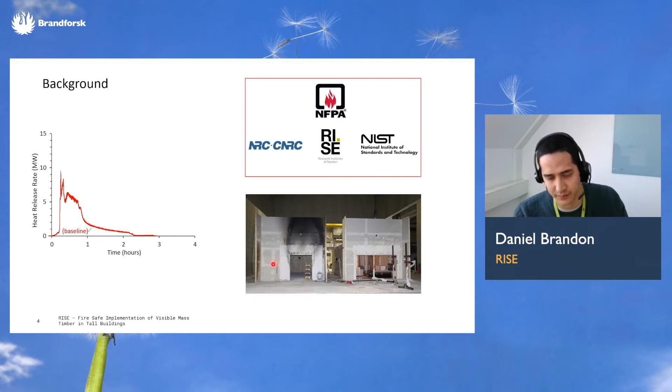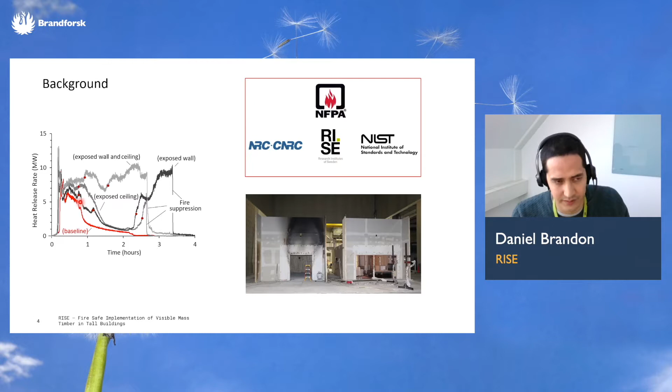I now add the results of the other test where some CLT was exposed, and you see that in contrast with the baseline test where we have a steady decay, there are locations and times in which the heat release rate increased, and we know that the movable content on the floor reduced in combustion rates. That does indicate that the combustion rate of the structure increased at these locations.

It was clear that fire-induced delamination was the cause of this. During fire-induced delamination, also called glue line integrity failure in Europe, the exposed lamella falls off due to weakening of the bond line, and it exposes a new colder surface to the fire. If the fire temperatures are hot enough, this surface heats up rapidly, chars rapidly, and combusts rapidly.

If we manage to avoid this delamination, then we could expect these points to change, and the fire dynamics in the room will change significantly.

As a response to this study and also some other studies that showed the same effect, there was a new regulation included in the PRG, a new test included in the PRG 320, which is the product standard for CLT in the US and Canada. In Europe, we expect an annex with a standard test method in the next Eurocode 5.

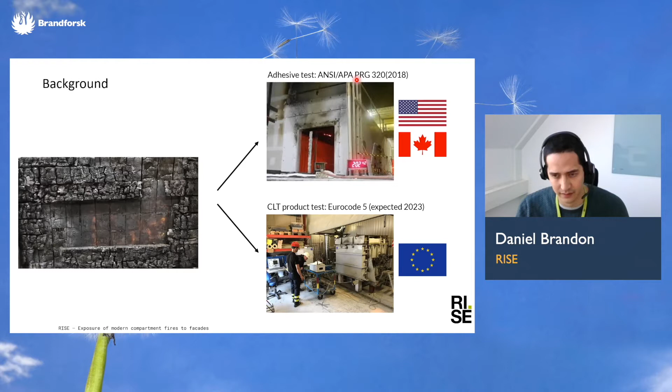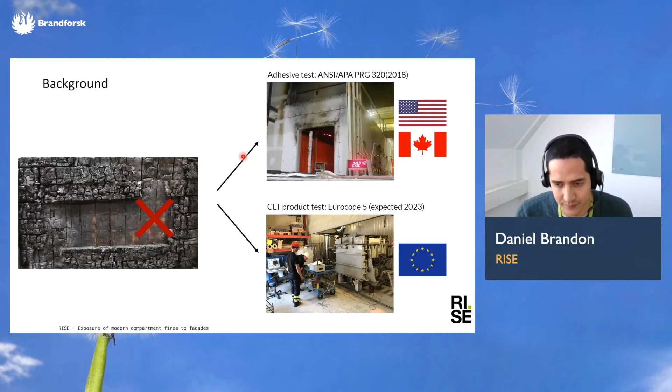And those both aim to avoid this delamination and subsequently affect the fire performance of CLT in compartment fires in a positive way.

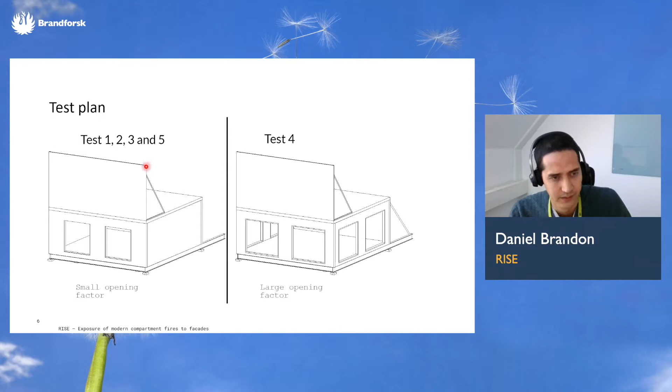So now with the new regulations, we actually need tests that are conducted with materials that comply with these new regulations, and that's why we did these tests. We performed 5 compartment tests, 4 with a relatively small opening and 1 with larger openings. We added a facade extension on all compartment tests to study the exposure of these fires on facades.

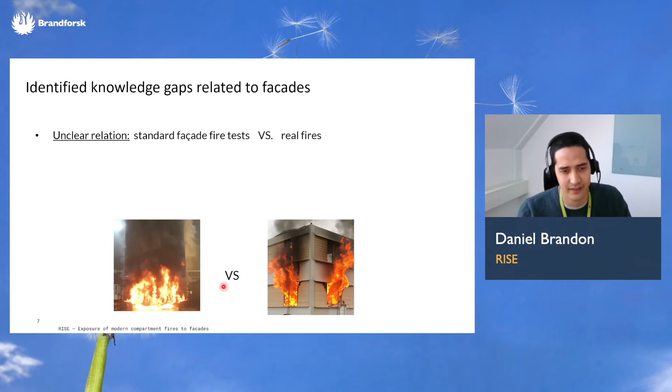One of the reasons to perform this research and study the facade fire exposure is that there is an unclear relationship between standard facade fire tests and real fires. Also, the number of compartment fires with essential measurements for comparisons are lacking. We didn't find a compartment fire test with measurements on the facade that correspond to multiple standard facade fire tests. And if we have that data, that would allow us to compare multiple standard facade fire tests, but also to assess whether these tests have a relevant and representative exposure.

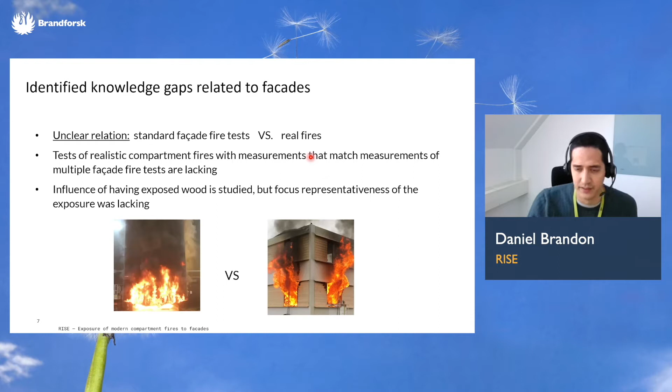Lastly, there have been studies that showed that having exposed wood inside a compartment can have an influence on the external fire plume. However, in those studies, there was no focus on the representativeness of the compartment. We know that, for example, the width of the opening has a significant influence on the fire plume. It is correlated - for slender openings, you can expect higher fire plumes.

And therefore, it is essential to test representative compartments in order to have a representative exposure.

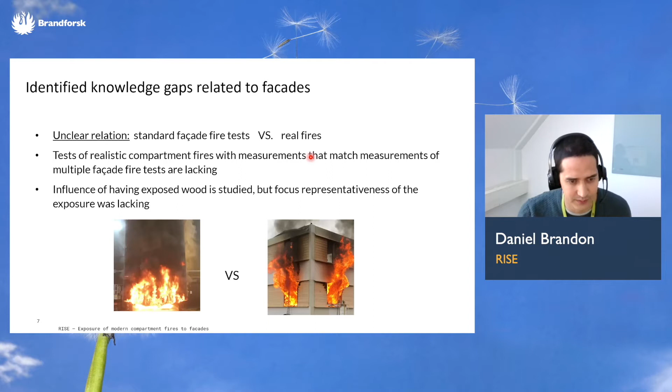In response to the gaps that we just showed, we have the following objectives: collect data of the thermal exposure to the external facade in relatively severe fire plume scenarios, compare the exposure to the facade to that of a number of standard test methods for regulatory compliance in North America and Europe, and mapping the change of external fire plume as a consequence of exposing larger surfaces of mass timber.

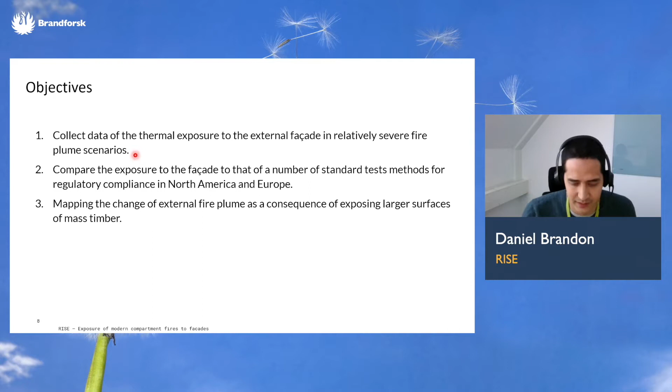In the first objective, I mentioned relatively severe fire plume scenarios, and that needs some explanation. To achieve relatively severe fire plume scenarios, we used statistical data from a recent study in Canada, which are the upper two distribution curves. But we also needed to have information of opening factors, and that we needed to do ourselves.

We performed a survey to determine opening factors of about 700 residential and office compartments, and that resulted in this distribution below. With these distributions, we predicted the expected char depth after a fire using a simple parametric fire model.

This model is simple enough to perform many times. We performed this calculation 100,000 times, where the computer chose a floor area, fuel load density, and an opening factor randomly, but based on the distributions. So after 100,000 calculations, we got this distribution of the final char depth.

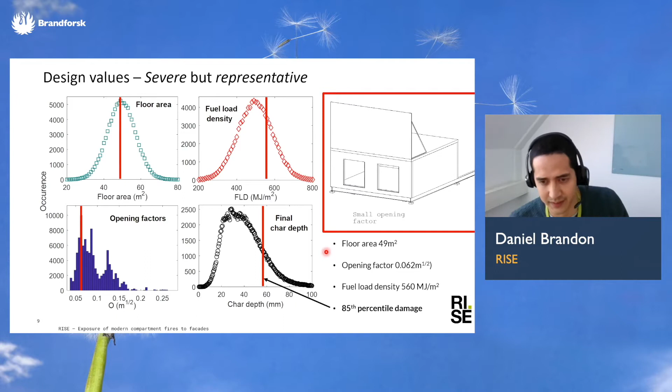We made sure that our test scenario had a relatively high expected char depth, and we ended up with the 85th percentile value of the expected damage or the expected char depth. The compartment that we chose had the mean value of the floor area according to the Canadian study.

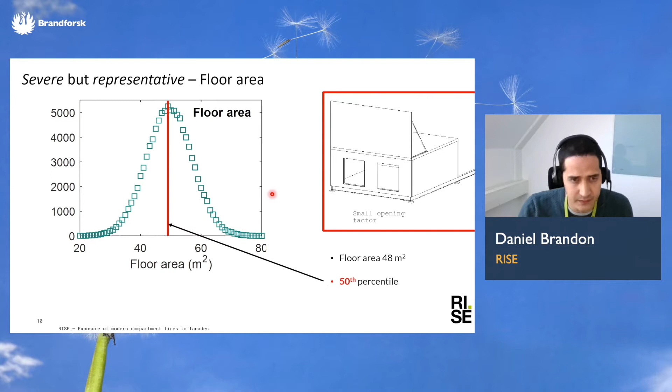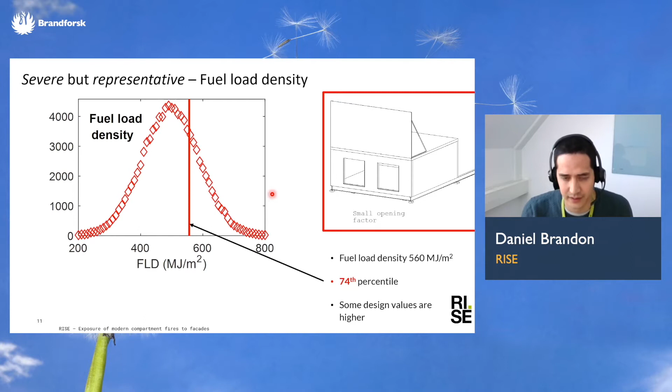We ended up with a 74th percentile value of the fuel load density. And that means if you have a higher fuel load density, we can expect a longer fire.

We also had a relatively small opening factor, which corresponded to the 25th percentile value of the whole database and the 7th percentile value of mass timber buildings. And that indicates that in our database, the residential mass timber buildings seem to have higher opening factors. We ended up with a low opening factor because that is the most severe scenario - there we can expect longer fires and higher damage after the fire.

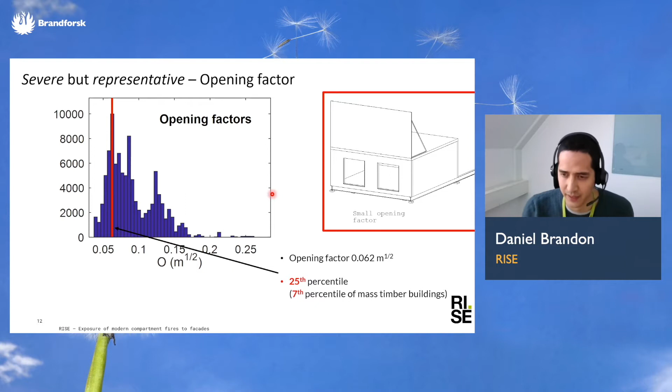So for the small opening factor, we ended up with a small opening factor compartment, shown in this distribution. The large opening factor compartment corresponded more with the office compartments that we had in our survey, which are shown in purple here.

The test specimen that we have of test 4 corresponds roughly to the center of the distribution of opening factors that we found.

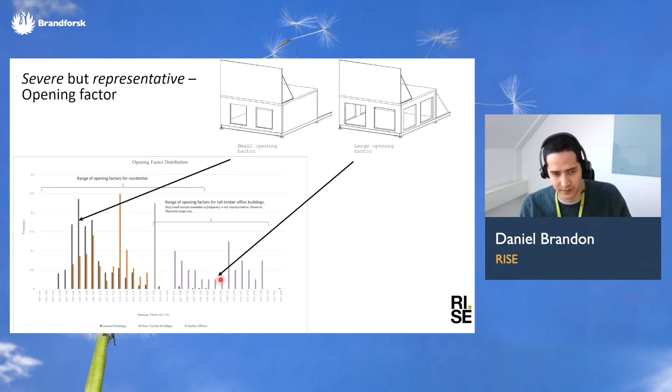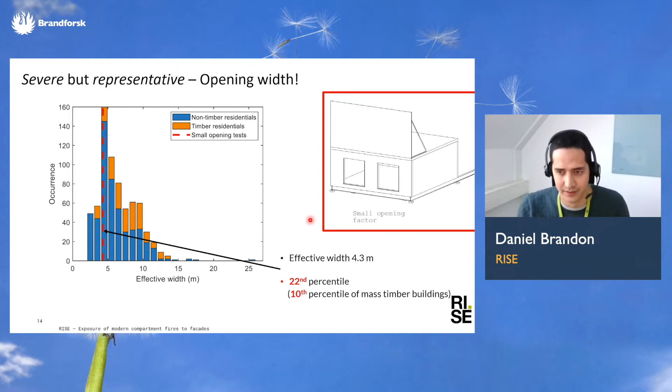For facade fire exposure, we know that the width of openings is important. For slender openings, we expect a higher fire plume, so it's important to be on the lower side of the distribution of width of openings that we see in real buildings. According to our survey, we were at the 22nd percentile value of the opening width, which was the 10th percentile value of the opening width for timber buildings, since they seem to have larger openings in the survey. This relatively slender opening would result in a relatively high fire plume.

Besides having a relatively high fuel load density, a statistically low opening factor, and statistically slender openings, we also had exposed surfaces of mass timber, which contributes to a more severe fire scenario. We had tests with surface areas of exposed wood varying from 54 square meters to approximately 100 square meters, corresponding roughly to 110% to 200% of the floor area.

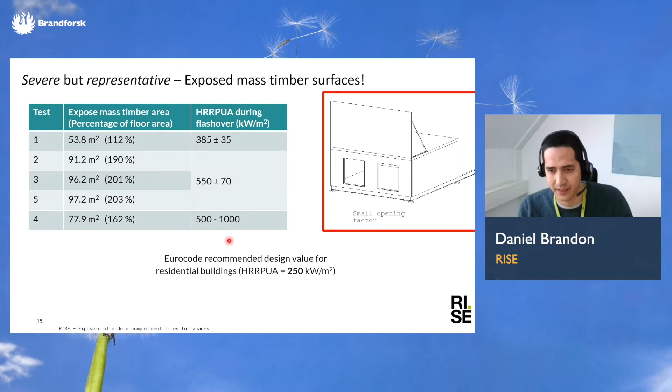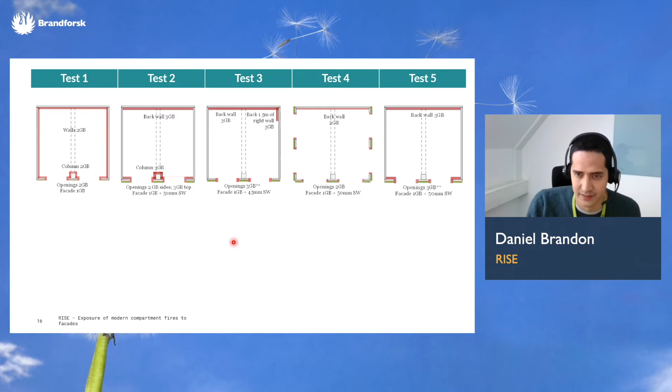The configurations of the tests were not all known prior to the test series, with the exception of test 1. Every other test had some parameters decided in between tests, namely the amount of exposed wood and the amount of protection on the protected surfaces. This decision was made between every test based on the performance of the previous test, modeling predictions, and the opinion of the steering group.

We started with the ceiling exposed, and in test 2 we increased the exposed surface area by exposing the left and right walls. The rest of the surfaces were protected with 3 layers of gypsum board. In test 3, we only protected the back wall and a portion of the right wall. In test 4, we only protected the back wall, but we only needed 2 gypsum boards in that fire. In test 5, we protected the back wall and 2 strips in the front wall.

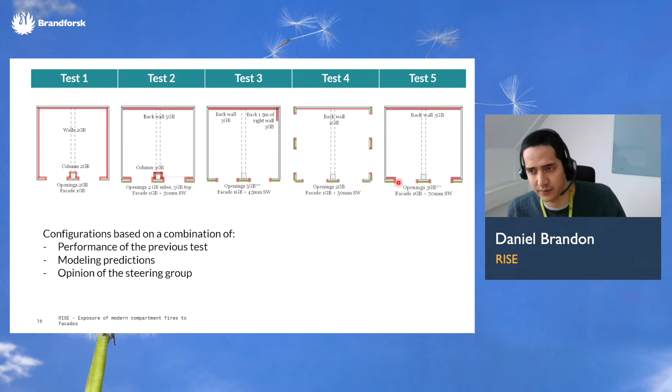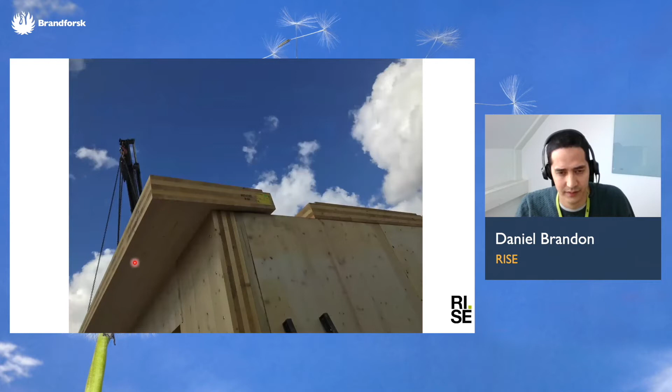Here you can see all tests at the same time, starting from flashover. You see immediately that after flashover, test 4 starts to cool down. The intensity of the fire reduces, and that happens slightly later in test 1. In test 1, the fully developed fire lasted 22 minutes, and that was longer in tests 2, 3, and 5.

For reference, we added a video made by NIST of a test in the NIST lab of a CLT compartment that doesn't comply with the current PRG 320/2018 regulations. Here you see the fire of test 1 starting to decay. Tests 2, 3, and 5 seem very similar, which makes sense since they also have relatively similar amounts of exposed wood. Here you can see the difference between the reference test and our tests increasing significantly, as this fire doesn't seem to decay.

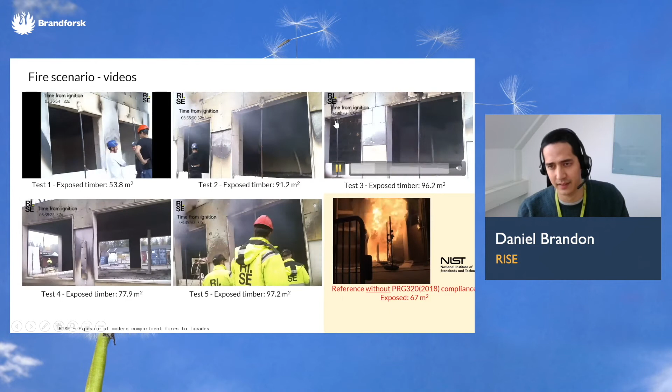At the end of the tests, the fires decayed mostly. In test 1 and test 4, there was very limited smoldering. In test 2 and 5, there was some smoldering in the walls, and in test 3 we had a reignition of some flaming in the walls. In comparison with our reference test, these results show a much more desirable fire scenario.

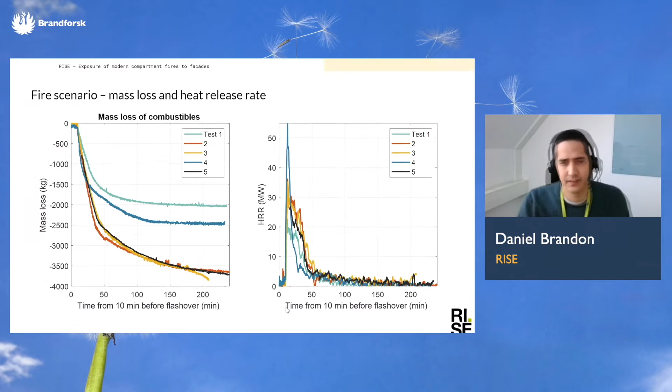For the facade fire exposure, it's important to know the heat release rate of the fire. The heat release rate in these tests was determined from the total mass loss, with some corrections for the mass loss of gypsum boards. That is all described in the full report.

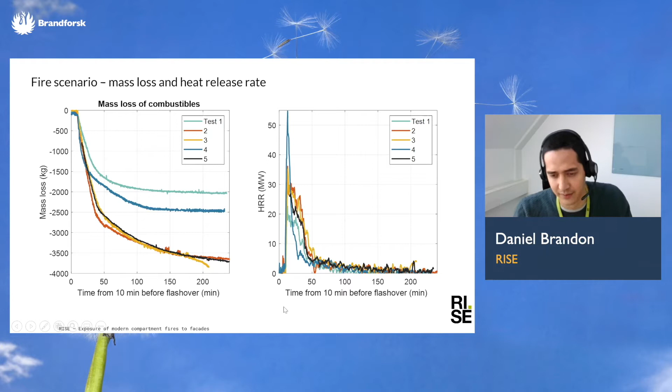Here on the left side you see the mass of the structure during the test, and on the right side you see the heat release rate of these fires. The highest heat release rate was seen in the first hour, which is the most important period when we look at facade fire exposure.

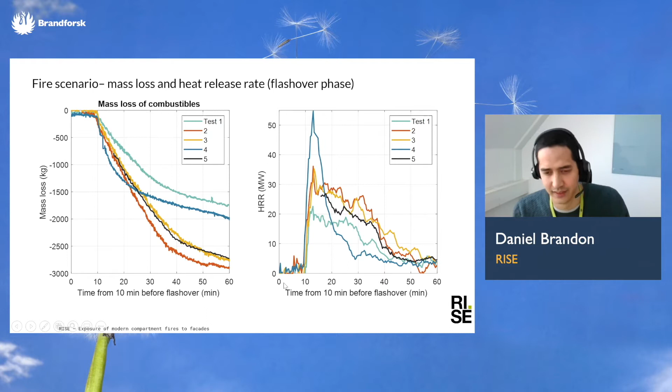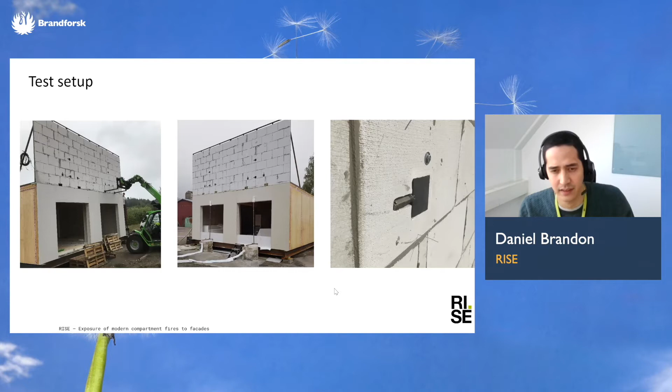These measurements were located in places that match those of standard facade fire tests, which is what Johan will talk about in the next few slides.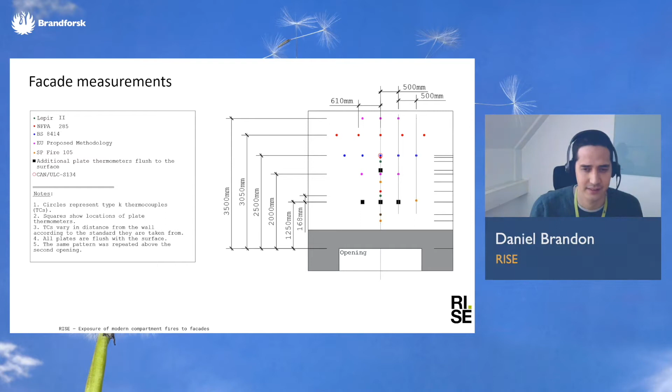Thank you, Daniel, for that. So yes, the positions of the thermocouples and plate thermometers we installed were in the exact locations where we could find measurements from some tests in the literature from other projects. For a fair comparison, the facade itself was not to be included in the fire, so we needed to find tests done on inert or incombustible facades.

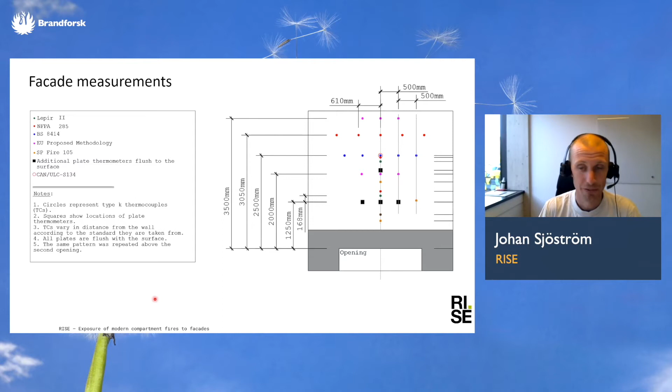That was actually quite difficult to find, but we managed to find tests from both a couple of European projects and from North America. Starting with Sweden, we use the SP Fire 105 test, which is a 4 meters wide and 6 meters tall facade. You can see the size of it here.

These three figures at the bottom are from this reference, which is one of the two references we use for comparison—actual tests. Behind the flames here are plate thermometers that we compare to our results. Here are the flames at 9, 12, and 15 minutes. They seem more or less constant during that period, but shortly after 15 minutes the test is finished.

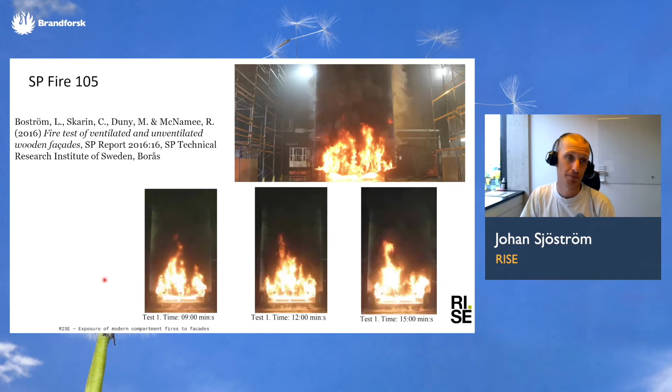Moving to France, the Lepir II test is used for compliance with regulations. The test setup is a two-story concrete building where the bottom floor, 2 meters high, has two stacks of wood cribs in it and a ventilation opening in the back.

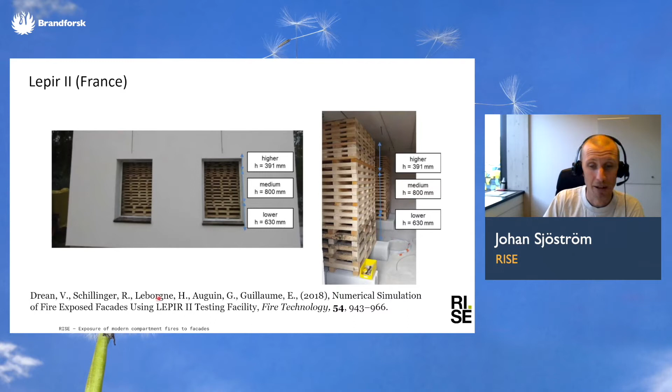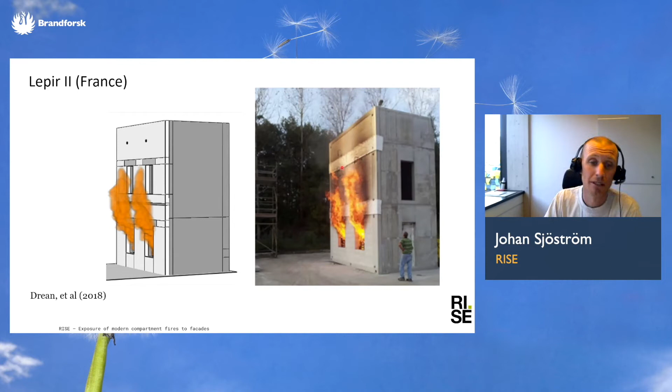There's been a drive for decades to come up with a European harmonized method to assess performance of facades in fire, and there is an ongoing project right now to finalize this method, based on the British method. In this project there have been some tests on the fire source, the wood crib.

These are some photos from a test series conducted within that project, and here is the report. The full facade is not present here, only a few meters above the opening, and behind it there are thermocouples and plates which we will compare to. You see that after 30 minutes there is still a big flame from this quite heavy wood crib.

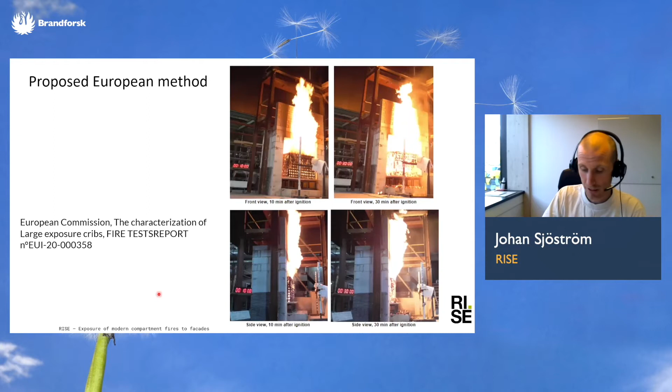The British method uses a facade at least 6 meters high, also with an ignited wood crib, and after 25 minutes you see a very tall flame from this test. These two photos are from a test on a brick system, and that's the actual data we use to compare flame heights between our compartment test and this test method.

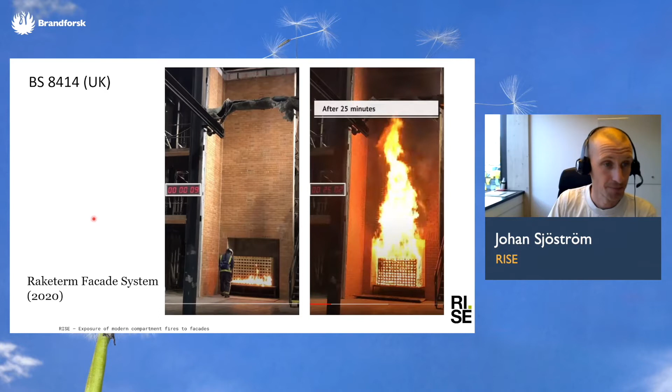Moving to North America, in the United States the NFPA 285 test is used for compliance testing. There you have propane gas burners within the burn chamber and also a burner at the window. Two systems are tested, one which passes and one which fails. Before installing the facade, you have to run a calibration test with thermocouples on the bare, incombustible structure, which must follow a certain temperature evolution—we compare our test to those calibration tests defined in the standard.

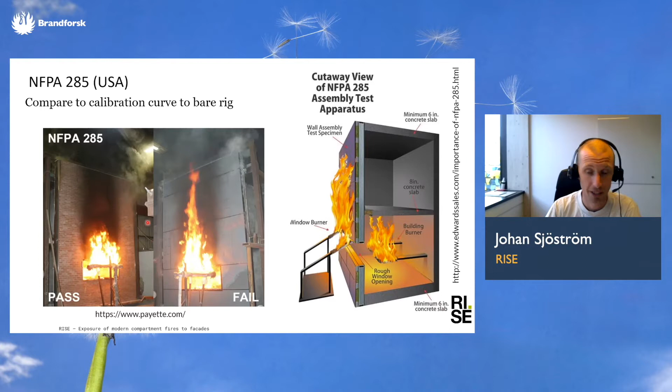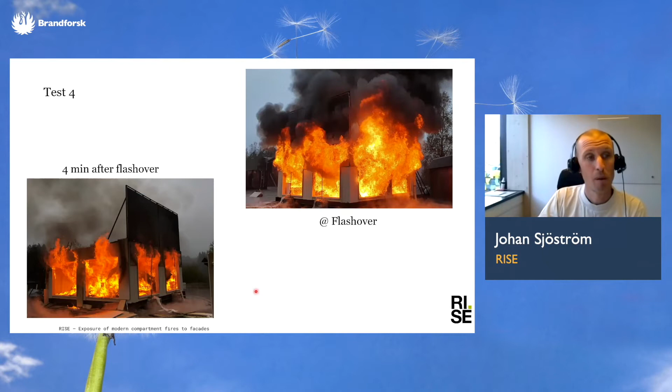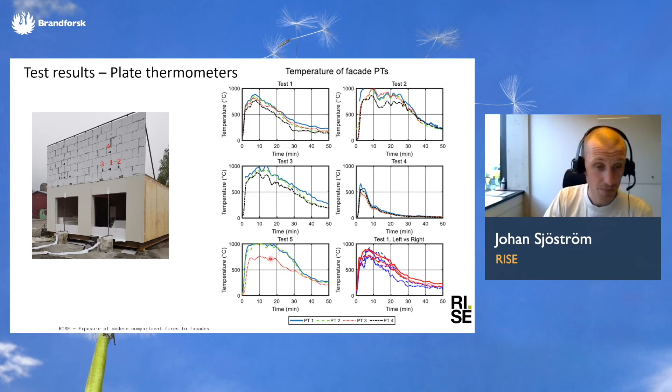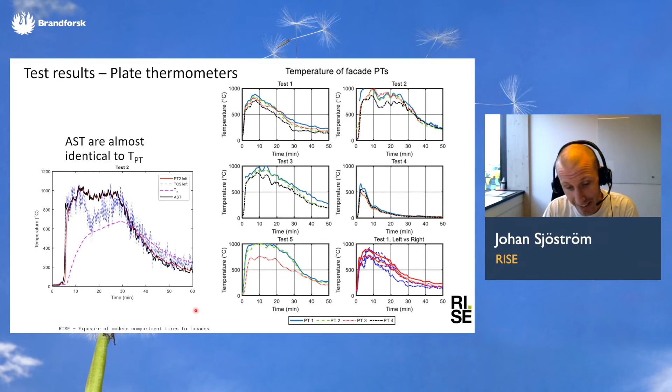So in the future, we only look at plate thermometer temperatures and say that they are basically identical to the adiabatic surface temperature. In addition to plates, which is a good indicator of thermal exposure, we also had small thermocouples, because the test data we compare with mostly only use small thermocouples.

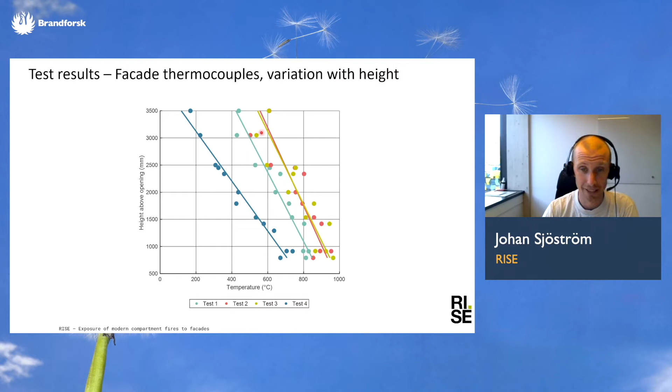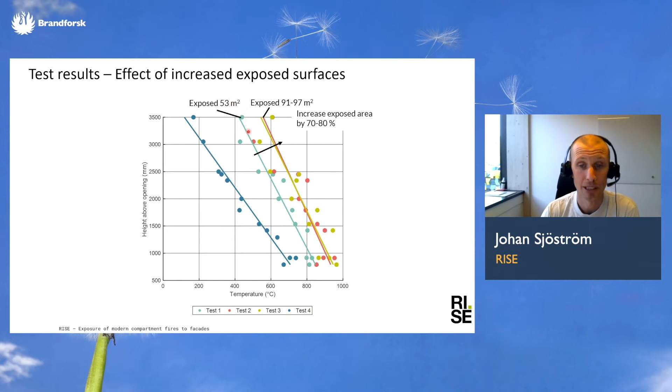We can also look at the effect of increasing the areas of exposed mass timber. In test 1, with the ceiling exposed, we have about 53 square meters of exposed timber. In test 2 and 3, this is increased to about 91 and 97 square meters, an increase of roughly 70 to 80%. What happens then is we see an increase in temperature on the facade between 100 and 130 degrees. Alternatively, to reach the same temperatures in test 1 as in test 2 and 3, you have to climb between 0.65 and 0.85 meters up along the facade.

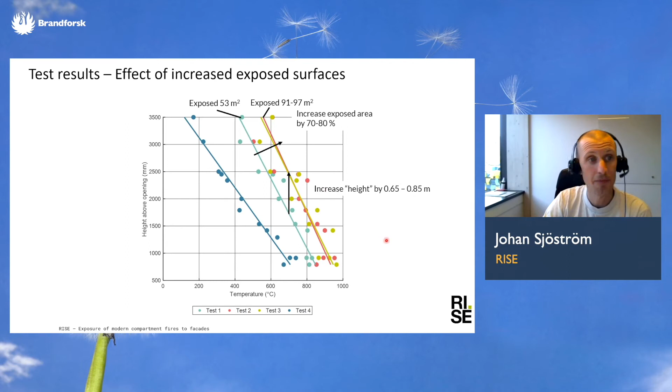This height difference is something you might be able to see in the flame height of the recording. We had an automatic image analysis routine to evaluate the flame heights of the tests, and we see they vary between 3 and just over 4 meters. Test 2 had the highest flame height, and test 3 had the lowest, and test 3 was the only test where we actually had a slight influence of wind, which reduced the height of the flame.

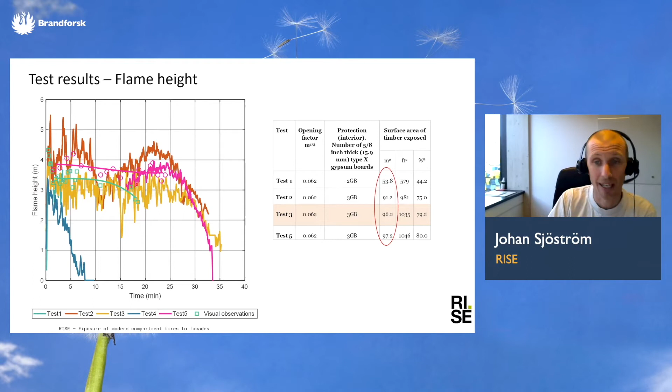But the most significant effect of exposing more mass timber surfaces was the increase in duration. In test 1, with the ceiling exposed, we had a 22-minute fully developed phase, whereas in test 2, 3, and 5, it was about 30 minutes. So that's an increase of about 30 to 40%.

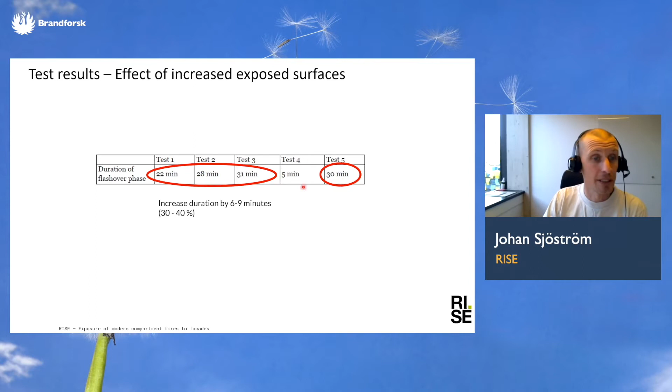Okay, on to the actual comparison between our compartment tests, which are severe and representative of mass timber buildings, and the compliance test used around the world.

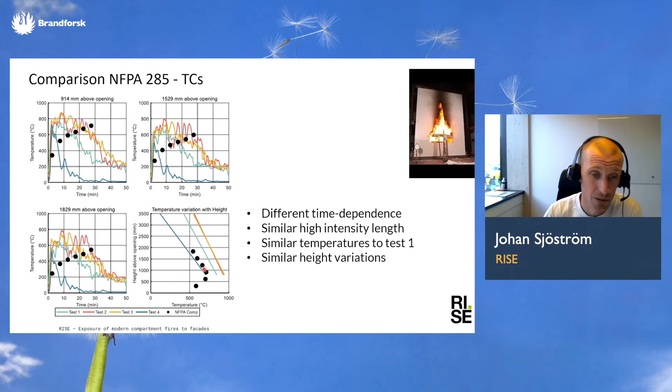So we start with the NFPA test in the United States. We see that the calibration curve there is meant to simulate somewhat of a time-temperature curve from a fire resistance test, so it increases throughout the test. It has a similar length of fully developed fire as our test, and the average temperature during the test compares pretty well to our test one, the one with only the ceiling exposed. We also see that the variation of temperature with height corresponds well to our compartment test.

Moving to Canada, we notice that the growth in the Canadian test is faster than the NFPA test, so it reaches high temperatures more rapidly. However, it reaches its maximum after only 20 minutes, followed by a decay. Generally, at least further up on the facade - at 1.5 meters, 2.5 meters, and 3.5 meters above the opening - the further you go, the colder the temperature of the Canadian test is compared to our compartment test. Generally, we see that it agrees with our test one after about 15 minutes after ignition.

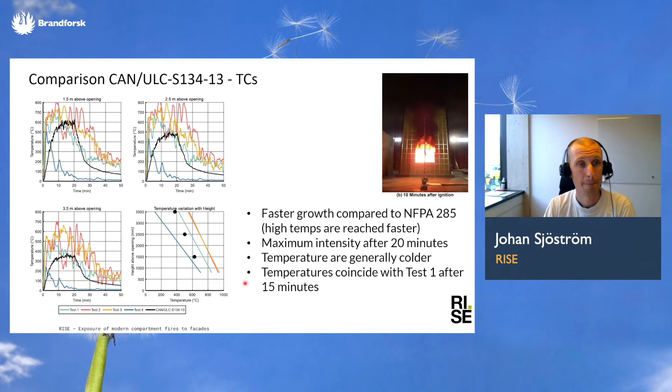In Europe, the BS8414 test used in the UK showed a close resemblance of the plate temperatures of the test and the compartments. So we see that it has more or less the same duration and more or less the same exposure.

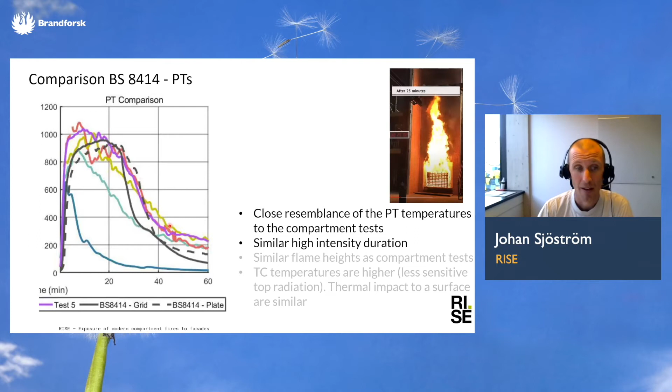On the other hand, we see that the thermocouple temperatures, the small thermocouples also installed on the facade, show higher temperatures in the test compared to the compartment test. The reason is that in the compartment test we have a very big flame which is ejected maybe a little further from the facade, so the thermocouple may not at every instant pick up the warmest gases. However, we have a lot higher radiation from the compartment test. So in the end, the plates, which are a good representative of exposure, are very similar, even though you see a difference in the small thermocouple temperatures.

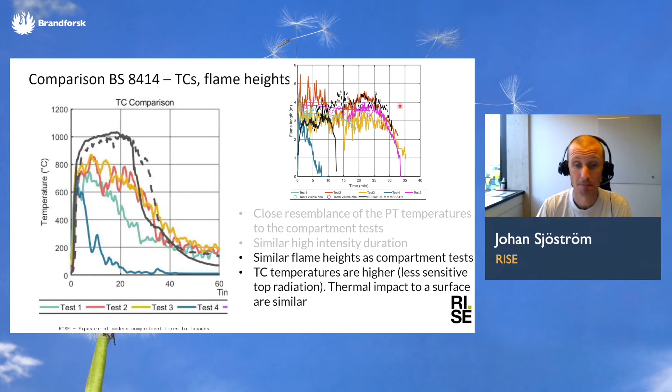The flame height for the British test is alongside the highest of our compartment tests. The proposed European method is very similar to the BS8414 test, and therefore we see that if we take the average of the gray ones here, which are the test method, and our compartment test, they actually fall within plus minus 100 degrees of each other.

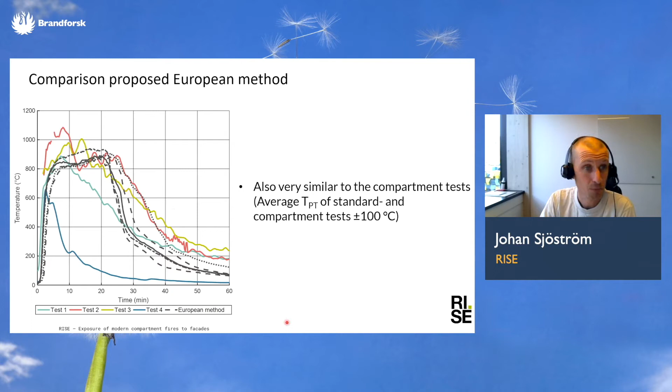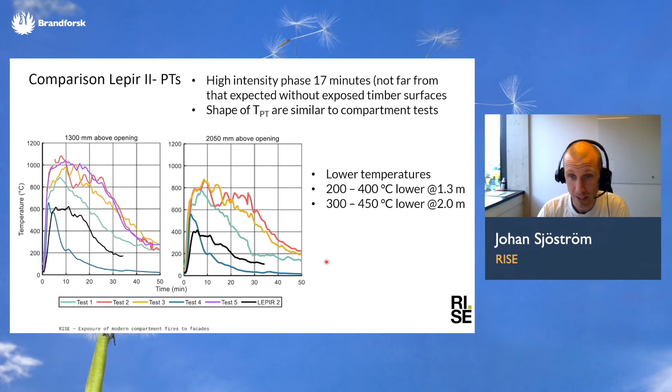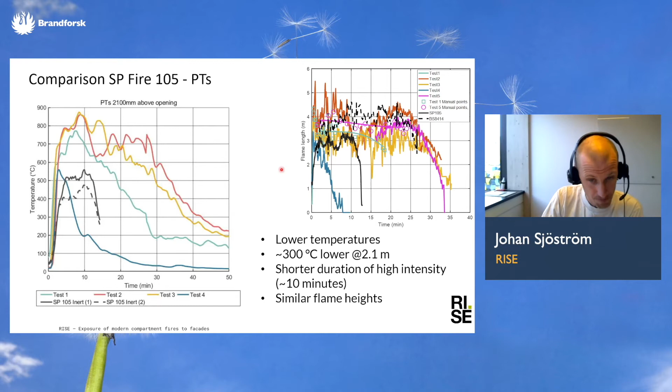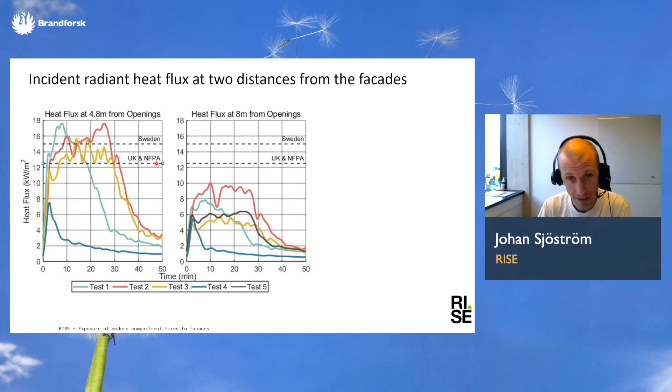So trying to conclude this: we now have data on the thermal exposures to facades from representative and severe mass timber compartment fires, and this can be downloaded from our project website. We notice that the standard test methods used for regulatory compliance differ significantly in thermal exposure to the facade, both within Europe and between North America and Europe. However, so does the assessment criteria associated with each method. So this is no evidence that any method will pass safer solutions to the market than any other.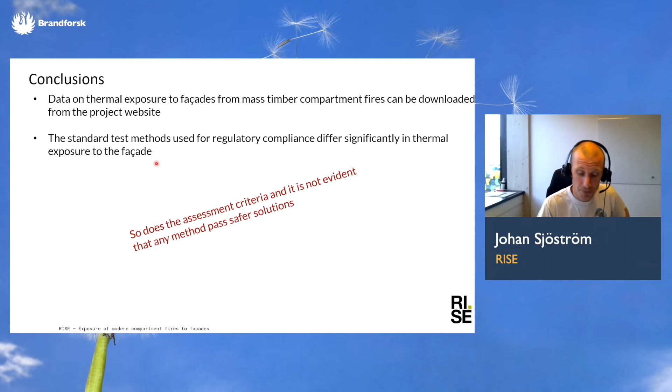We can conclude that the BS8414 method and the proposed European method, at the evaluated heights from this study, are very similar in thermal exposure to the most severe mass timber compartment test we performed. The NFPA and the Canadian test are similar to the test we performed with a full ceiling exposed, so test 1. The Lepir II test and the SP Fire 105 show clearly lower temperatures on the facade than our compartment test.

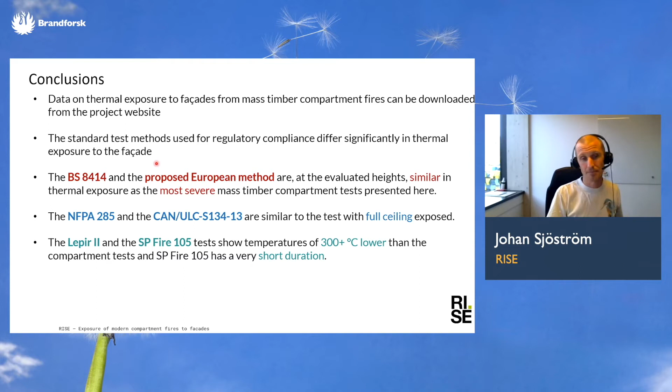SP 105 also has a very short duration compared to the compartment tests. Finally, if we increase the area of exposed timber by about 70 to 80%, from just over the floor area of the compartment to roughly twice the floor area, we increase the duration of the fully developed phase by 30 to 40% roughly, and the temperatures on the facade by 100 to 130 degrees, as measured by small thermocouples.

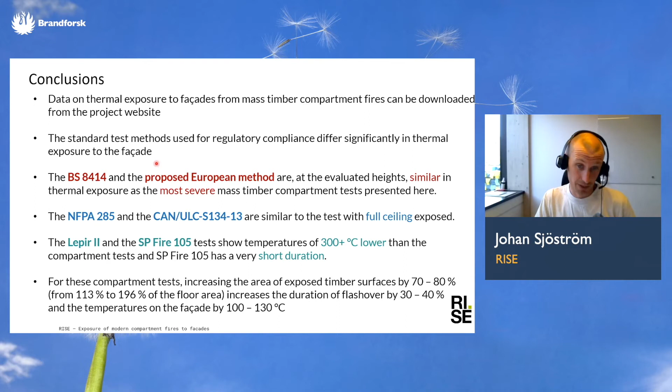The report and the data are available at our project website, and also at the Brandforsk website, where you will be able to download the report. I included a figure here of pre-flashover in test 1, where you actually see flames going out even before you have a fully developed fire.

If we can share my screen, I've got an image which shows some shots, a brief overview of how we did it. One of the other guys involved in the project actually did this work for us, so we should credit Emma with the hard work that went into it. In essence, we took the frames from the videos and converted them into a grayscale image, and then from there into black and white.

That allows us to define the flaming regions. And then at each step, we took whatever the highest, the tallest consistent flame was that was emanating. So for the example we've got here, you can see there's two small bits which are broken off at the top, so we ignored them, and with the red box, we have the area that would be chosen for this particular frame.

And then we know the height related to each pixel, or close enough—it'll be slightly distorted from the angle, but it's reasonably good. That gives us the height of the flame up to a limit, so there are a small number of flames on a couple of tests where it just exceeds the limit, but it's not very often that it hits the top. And it's 120 frames per second, so it's a lot of frames.